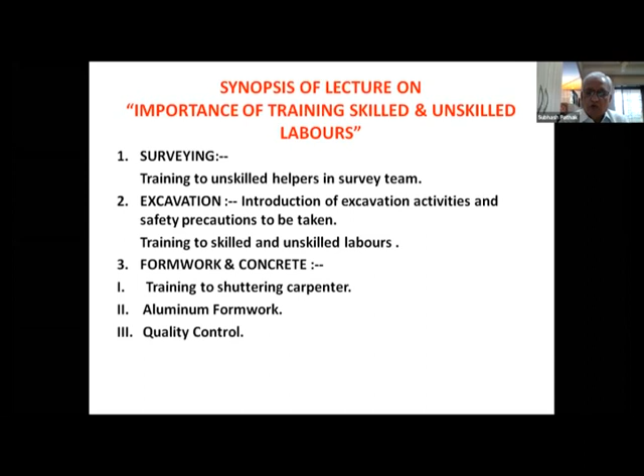Surveying, then excavation, formwork and concrete, then MS reinforcement, masonry, plaster, tile flooring and cladding, plumbing and firefighting, AC sheet roof, then road machinery, roller and paver, and material storage.

The training to skilled and unskilled laborers for the cement, steel, coarse and fine aggregate, marbles and tiles, impact on floor during unloading of full pressed cotton bales, and the conclusion.

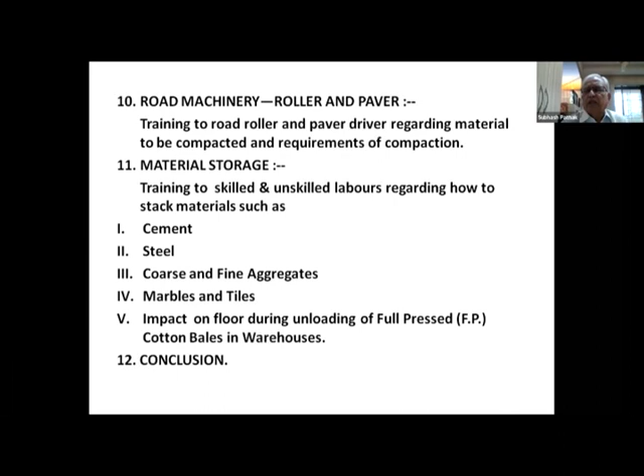During my service in the construction industry for the last 47 years, after retirement also, I am putting my services as a consultant and as a trainer.

So till today also I am getting the latest knowledge of the technology which is being adopted for training to the workers, that is skilled, unskilled laborers, and the supervisors, the engineers, then the project managers and directors. But today's lecture is limited to the supervisory, unskilled, and skilled laborers only.

To start with, any organization, any project has this hierarchy chart of the supervisor, then project manager, and the director. Their functions are: for the supervisor, operational control; for the project manager, administrative control; and the director is for taking the decisions.

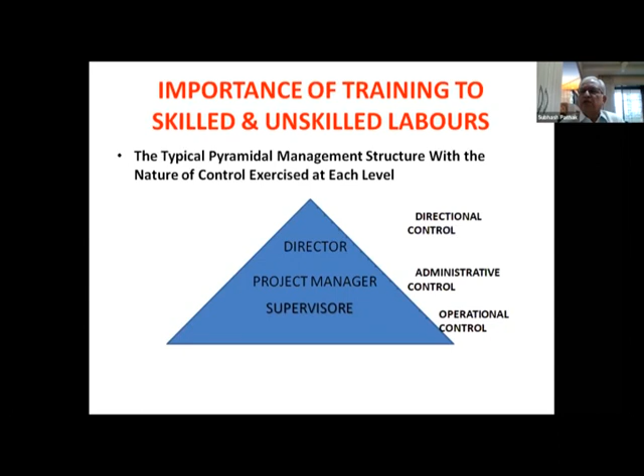So what are the benefits of operational control, and who are the stakeholders for operations? The stakeholders are the engineers, then your skilled and unskilled laborers, then your supervisors.

And on these operational stakeholders, see how much the quality, wastage, and time depends, that we'll be discussing all the while.

It improves the productivity, then minimizes the unproductive man hours. What do you mean by unproductive? That means whatever work they carry out during the day - say if they carry out 8 hours, out of which 2 hours is lost, that is not productive, not giving any results. So that is unproductive. Then the wastages.

Whatever material they are shifting from ground floor to first floor, second floor, third floor in a multi-story building, if that material is not good, the labor should be instructed at the initial stage to sort out the good material from the bad material. This training has to be imparted so that wastages are minimized. Then economizing plant and machinery - the same thing holds good for plants and machinery.

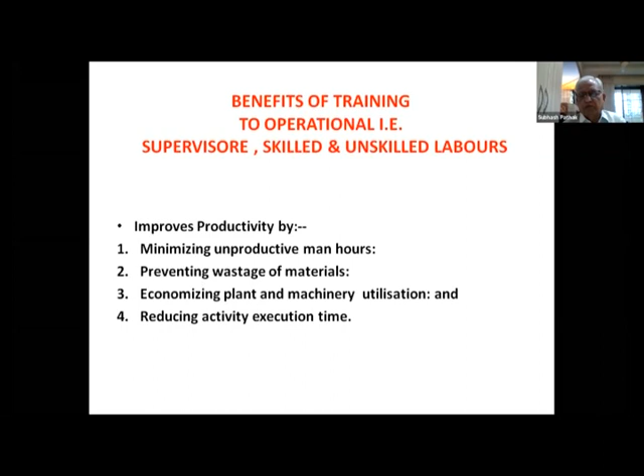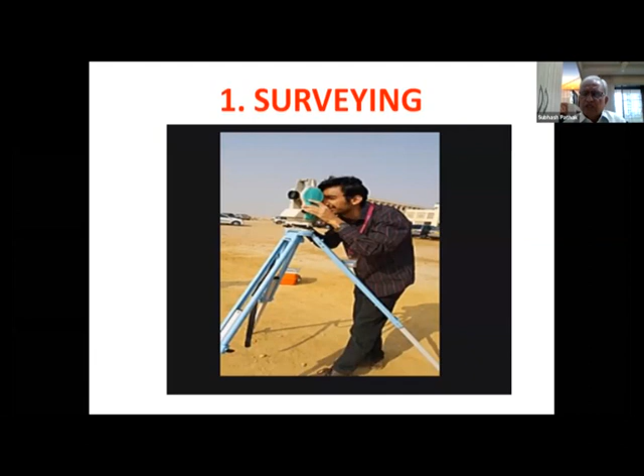Since I worked in the irrigation department primarily, the first job was to make this survey, that is contour survey of the bridge site, canals, aqueduct site, and the approaches. The approaches were about 500 meters upstream and 500 meters downstream, and the structure portion was about 60 to 80 meters. So about a kilometer, 1200 meters jurisdiction, was not an easy task to carry out the survey. At that time I was given only unskilled laborers.

These were the project affected persons, whom I taught how to hold the staff, how to measure the staff, then to make the grid for contour survey, how to make the grids at every 5 meters. One string having demarcation at every 5 meters, about 80 meters or 100 meters long.

Then we used to take the measures and levels very swiftly and smoothly. Very importantly, signaling or instructions are required to be given to the workers at a distance of even 500 meters, so that they understand and act accordingly. Also very important, they have been taught how to take the instrument from the box, dumpy level and theodolite, and how to again reset it. This is also a skilled job because it takes time.

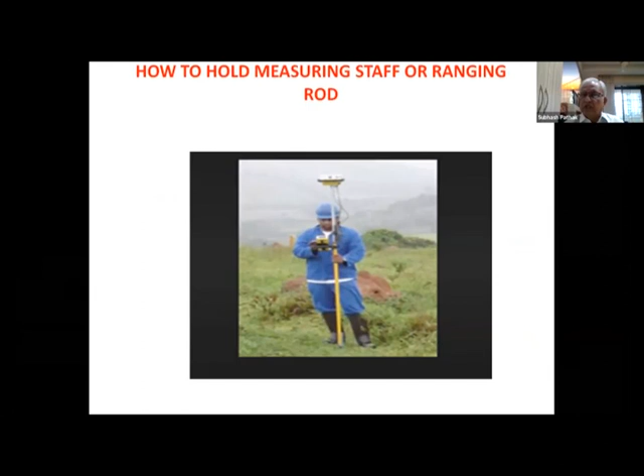Then very importantly, in every project - irrigation, building, or road project - the TBM must be prepared, so the mason is required to be given training. First of all, the TBM is an important structure, and it has to be rested on firm ground, that is the foundation.

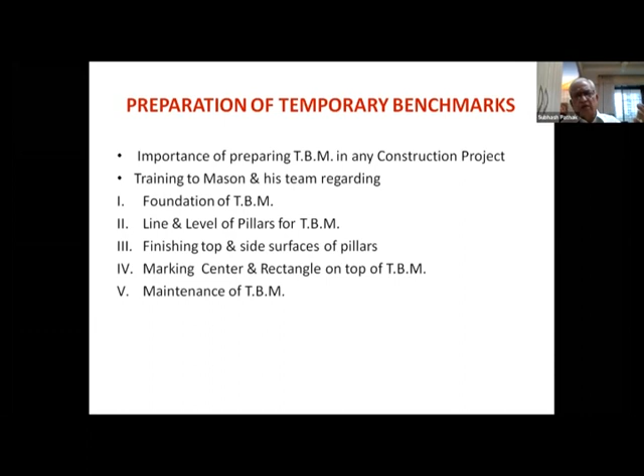Line and level is a must, and especially the top level of the TBM should be perfectly verified with a spirit level. Then the finishing of the top, marking the center and rectangle on top of the TBM, and the maintenance of the TBM is also important. It has to be provided plaster on all sides, and that also 1 foot below the ground level, so that during flood or rain it doesn't scour away.

Now this is the latest topic, the excavation. With the help of a JCB, how the excavation is carried out, and where the excavated stuff is to be dumped. For a trench, the precautions are very less, but in case of mass excavation, if it is black cotton soil, then it is good for the farm but it is a treacherous soil, so it is required to be dumped away, or it can be used only for landscaping.

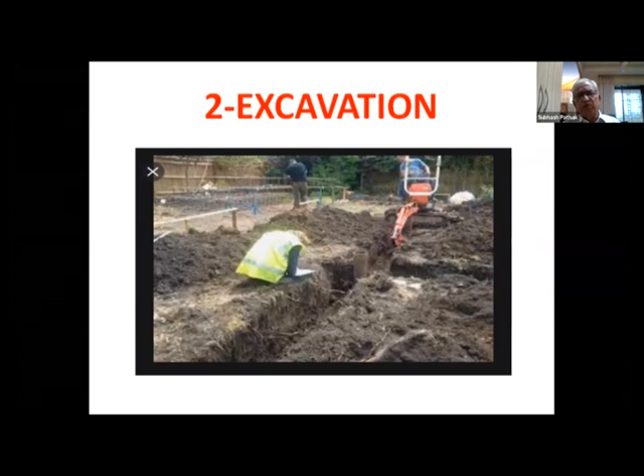In excavation, in my opinion and experience, most of the fatal accidents occur at the stage of excavation only. At an irrigation site, I observed one fatal accident. During a recess of the excavation work, one laborer was sleeping in the foundation trench, and it collapsed.

It is my earnest request and suggestion to all dear friends that laborers are instructed to deposit excavated stuff as and where directed, to avoid collapse of the sides and rework of lifting, and to avoid untoward fatal accidents. At no time are laborers permitted to take their lunch, rest, or let their children play in the mass excavated trench or near the trench.

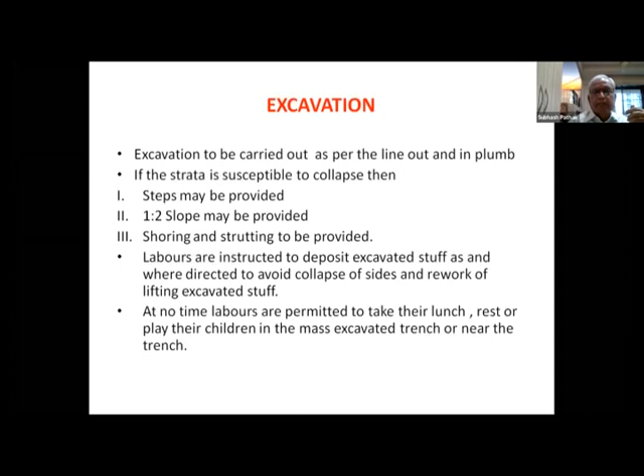Shoring and strutting is also required to be taught to them, especially for the work of manholes, and that too in places like Bombay where manholes are 40 feet deep below the ground. There the chances of excavation collapse are more, so how the shoring and strutting is carried out is very important.

Then the safety precautions. What are the safety precautions? The first safety measure is that we are using radium tape today, so that trespassers are not permitted to enter inside the radium barricading.

Since I also work in Bombay, where pile foundation work was going on, laborers should not be permitted to step down into the bore to take away their chisel or any equipment. The borehole may be 300mm or 600mm, but they should not be permitted to step down. Otherwise, there are chances of fatal accidents.

Then backfilling the trenches. How backfilling is to be carried out to avoid shrinkage, to avoid subsidence of the soil, ground, or roads, is very important. I will show pictures also. The boulders and rubble should not be dumped for backfilling.

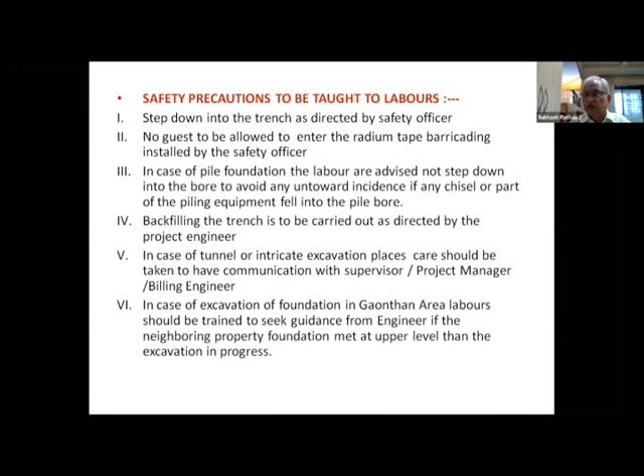If they want to go below the foundation level of the adjoining abutting property, then a risk is involved. This is very important. So training to the laborers in excavation is very important.

Then excavation in hard rock. In hard rock, the contractor is permitted to go up to the foundation level. If the foundation is in hard rock, and the Poclane or JCB operator carries the excavation below the hard rock, he is not able to control the undulations, which may be 0.45 meter, 0.30 meter, 0.15 meter, or even a small level.

So how to control it? That's why the Poclane operator is required to be trained. In my opinion, he should be cautious, first of all, before the foundation reaches 0.3 meter. At that point, the engineer and supervisor should be there.

He should be given a good signal to stop, and the excavation should not be done more than 7.5 centimeters, because up to 7.5 centimeters he can lay plum concrete and make it good. Below that, the contractor has to pay from his own pocket. That's why training to the Poclane operator is very, very important.

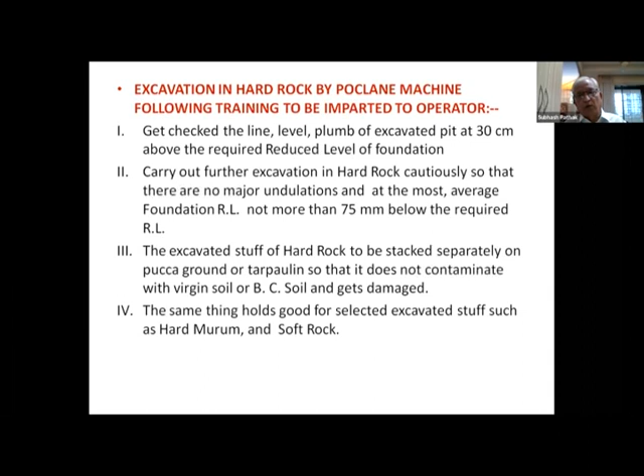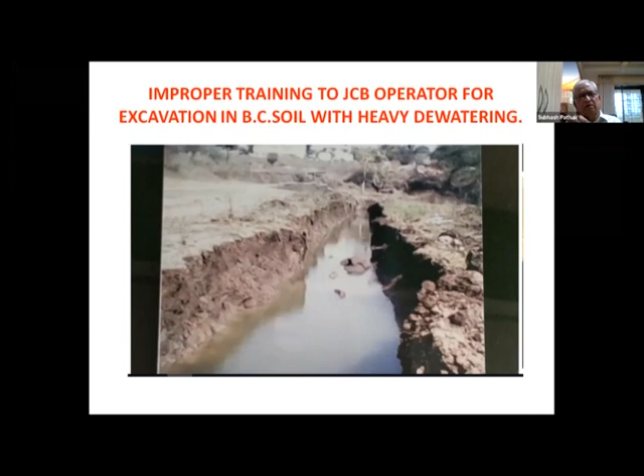So the problem existed for 8 to 10 months, till summer, when the water level in the river receded. Only then could he tackle this excavation problem and the collapse of the sides. Removing the mud is a riskier, more expensive job. This is only because of the illiteracy of the JCB operator.

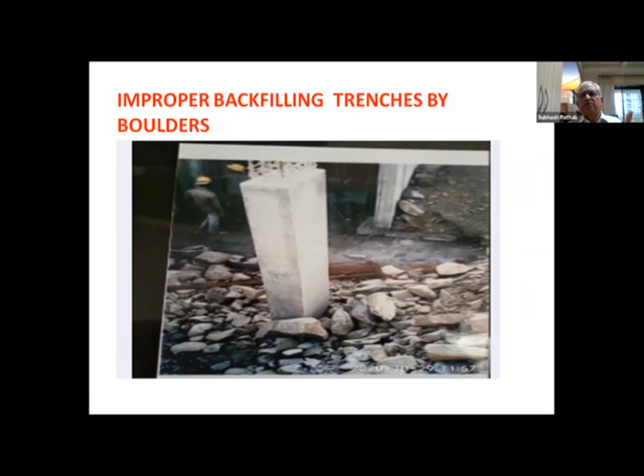That's why backfilling is required to be done with screened sand or hard murum, and at every 0.3 meter, the Proctor density test is required to be achieved. Then and only then will this stand. Otherwise, it will be of no use. Then the formwork, shuttering, and concreting.

Since I am also an L3 auditor, that is consultant to the CQRA, we have observed many shortcomings in the MNC projects. So what are those? Let me share with you.

Regarding the supports to the shuttering, props are required to be given for shuttering. Then double stage centering in multi-story buildings is carried out for the terraces, because in alternate floors one has the floor terrace, other has a 20 feet high terrace. That is why double stage staging is required. Then bracing at the top level, that is 1/3 and 2/3 level. The time of removal of shuttering is very important, and the props left behind.

Then there is the slump test. For the assistance of the engineer or supervisor, the unskilled laborers are there, so they must also be given primary knowledge of the slump and everything, then that work succeeds. Otherwise whatever results are there may not be good, they may not be as per specifications, so rework is required to be carried out.

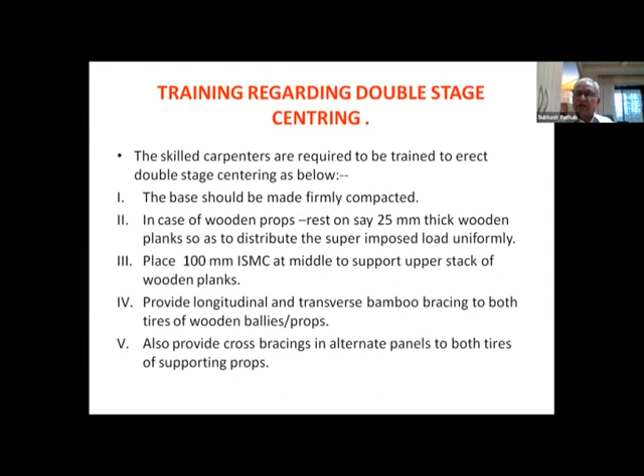Then provide longitudinal and transverse bamboo bracing, and the alternate bays are also required to be braced properly, and also provide cross bracing in alternate panels to both tiers of the supporting.

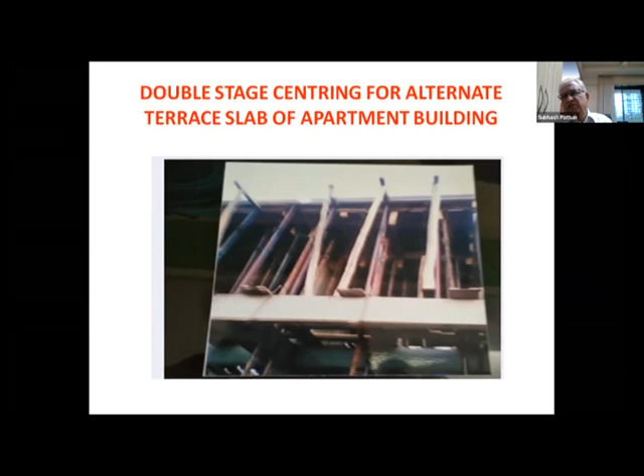Now regarding the trestles. Trestles may be of size 30 centimeter by 30 centimeter or 45. These trestles are also required to be rested on pakka flooring, that is you may provide CC 1:3:6 floor, and on that floor, in case of bridges, you provide the pakka flooring, and on that pakka flooring you erect the pedestals. The pedestal height should not be more than 45 centimeter. In that pedestal, provide anchoring bolts to hold the trestles.

Then the trestles here also may be in 1 tier, 2 tier or 3 tier depending upon the height of the trestle. Generally the height is 8 feet, that is 2.4 meter. Then in this case also provide longitudinal, transverse and cross bracing with 25 mm bars. All these precautions are required to be taken.

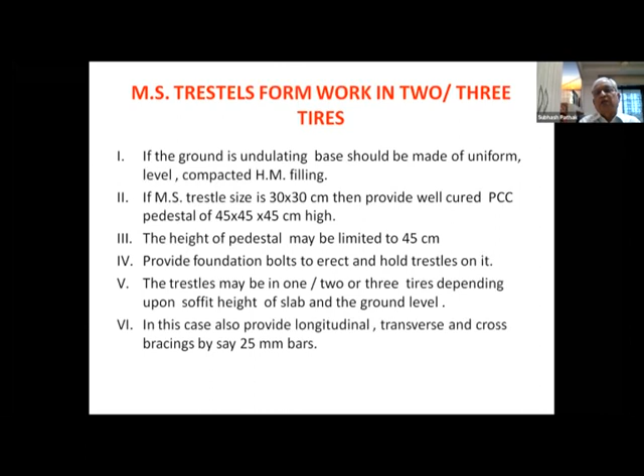It should be ensured at the time of casting the slab also, because previously the slabs were solid slabs, and for the 10-meter span the thickness of the slab was 90 centimeter. So the skilled carpenter is also required to be deployed at the time of casting near the trestles.

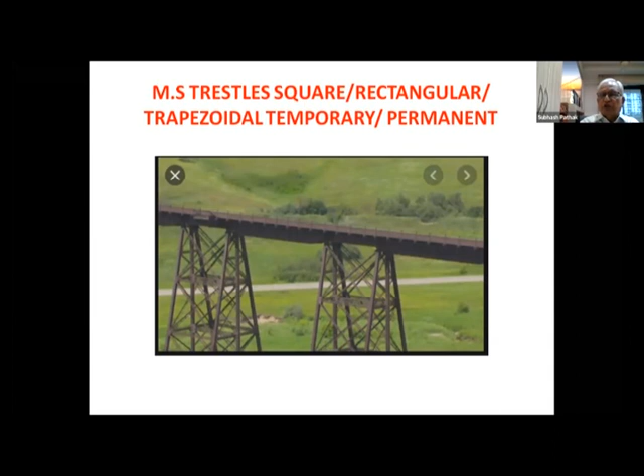See, this is the type of trestles which are also required for your bridges. Every now and then I'm stressing that good constructional practices should be there. And in this case, you can see the props have been...

Now this is the excavation for the 28-story building. So the engineer is standing there, imparting training and instructions to the carpenters, showing how the foundations, the raft, and the footings are to be laid. Such training is required to be given to the skilled and unskilled laborers every now and then. That is where the success of the building lies.

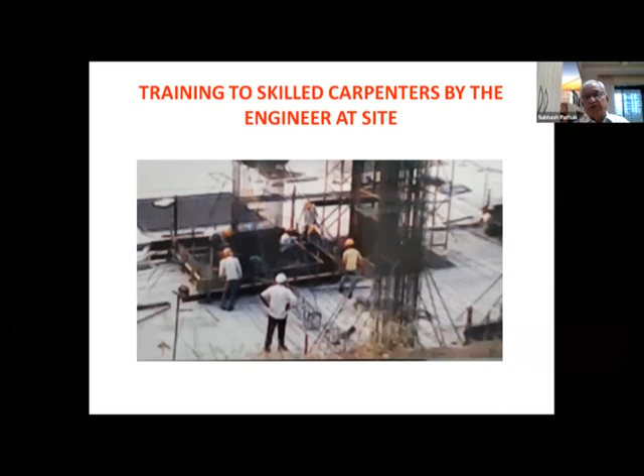Now, this is IS 456. Dear friends, the foremen, the carpenters, and the skilled laborers, though they are not aware of IS 456, we have to give them some primary knowledge. So what is that primary knowledge?

For your site, after casting the slab or column, a minimum of 24 hours should be left. So after 24 hours, that shuttering or side should be removed.

I would cite my own experience that in the year 1980, when I was working at Bombay on a big project. One fine morning, a carpenter approached me in my site office and told me, sir, I have de-stuck the side shuttering of the column, and the column has collapsed after 48 hours also. So the problem started there.

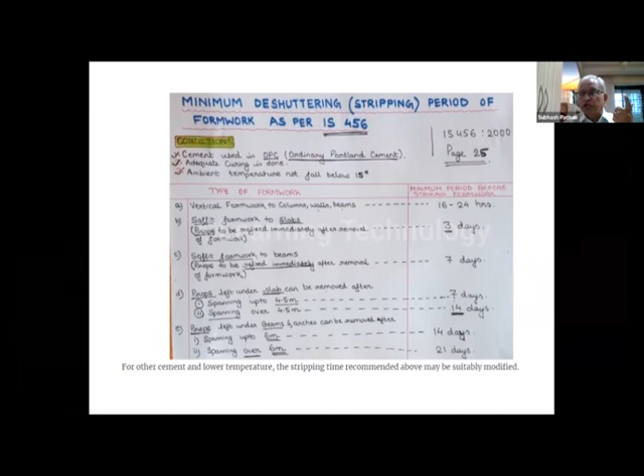And if it is multi-storied, how those props are required to be left behind - that is also one of the skills, and I will be showing photographs of how engineers are neglecting this. Then props for spans up to 6 meters require 14 days, and beyond 6 meters, 21 days are required to be left.

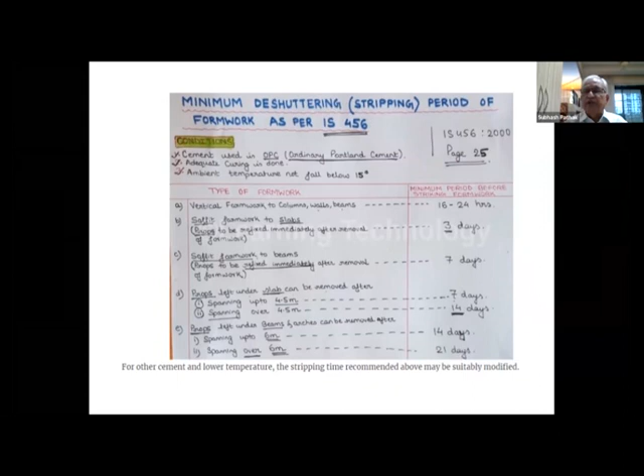So that training is important to impart to the carpenters, to the skilled laborers. It is very important to train carpenters regarding which temporary props are left behind as support to the beam when the upper story construction of casting column, beams and slab is in progress.

Nowadays, to the best of my knowledge, an 18-day cycle is repeated, or if it is aluform or Mivan shuttering, a 10-day cycle is repeated. Under such circumstances, after casting the slab, as per the period mentioned in IS 456 and the span, the bottom props and centering ply that we have studied are stacked out. However, when the upper construction is in progress, it is necessary to keep certain props as support to the bottom floor beams.

I will show the images, and that will be self-explanatory. Those are self-explanatory, see, that one at Bombay, and that also in MNC companies. Generally, 3 to 4 props are left in the 3 to 4 meter span.

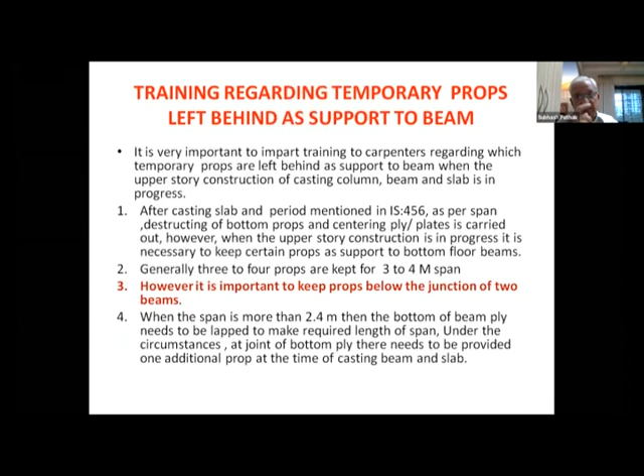However, it is important to keep the props below the junction of two beams. Second, when the beam length is more than 2.4 meters, the plywood is required to be lapped, and at that lapping also one prop is required to be left.

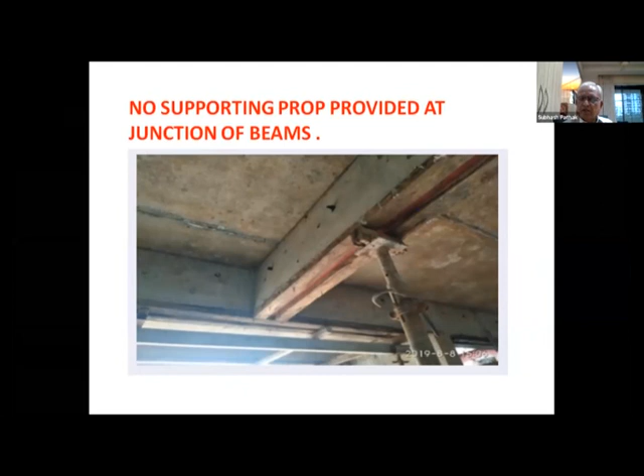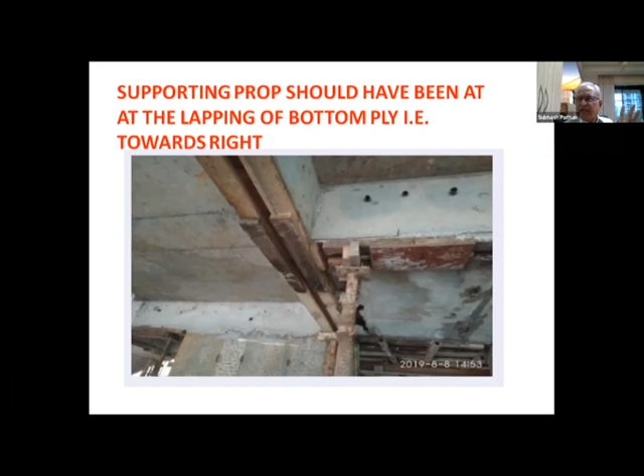See here, the lap is clearly there, but the prop has been provided beyond that lap. So what is the use of that? Here also. This training is required, then there will be zero accidents.

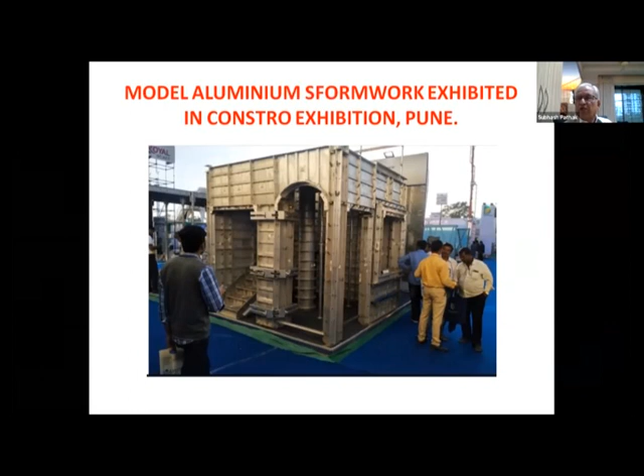Now this is regarding your formwork. In Constro, many companies are there, so I have taken snaps from there. See the accuracy, see the plumb, and that is required to be taught to the carpenters.

Now regarding the concreting. For formwork, we have to take utmost precautions, and now concreting. Nowadays we are getting concreting by RMC, but most concreting is also required to be manufactured at site on a volumetric basis or weighment basis.

So what are the likely mistakes, and what is the domain where skilled and unskilled laborers are required to be given training? First of all, the dimensions of the measuring boxes. Dear friends, even fresh engineers don't know the dimensions of the measuring boxes.

This training is also required to be imparted to the laborers, that the dimensions are 0.3 by 0.3 by 0.375 meters.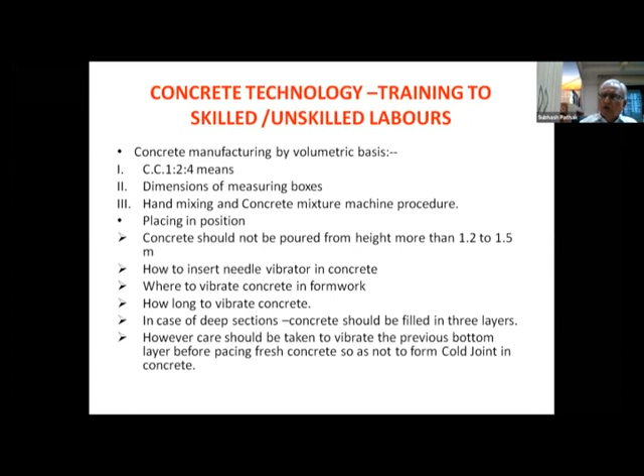The thickness is 20 centimeters and cold joints are formed there. Why? Because the difference between laying the bottom concrete and the top concrete is more than 1 to 2 hours, and the bottom concrete is already set. This is the picture.

Now see, here the soil is being contaminated, the soil is being mixed with the metal. Your metal is very good, however the laborers are not given training, or there must be a supervisor who should be there giving them instructions all the while.

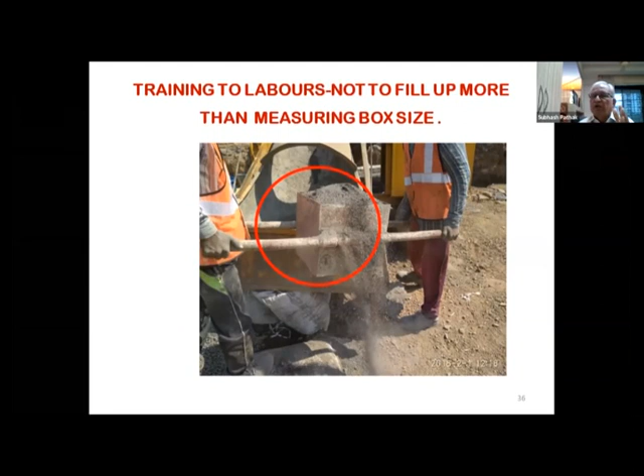Now see this is also a picture. This is not weighment batching, so that is volumetric batching. See, the heaps of sand are there, that is beyond your required size, so naturally the sand will be more. Now see the effects, these are the ill effects, what is that—honeycombing.

What do you mean by honeycombing? In honeycombing, the voids which are more than 6 millimeters are connected with each other.

Superficially a skin is there, and that skin needs to be removed with a mallet, and then you can see the severeness of the honeycombing. Especially in water retaining structures, this is very dangerous. That is why water retaining structures are required to be tested with mallets. If it gives a ringing sound, it is good. If it gives a hollow sound, then that concrete is not good - it is bound to be there.

Especially in the case of beams where the steel reinforcement is in 3 tiers, the chances of honeycombing at the junction, that is in the shear zone, are more.

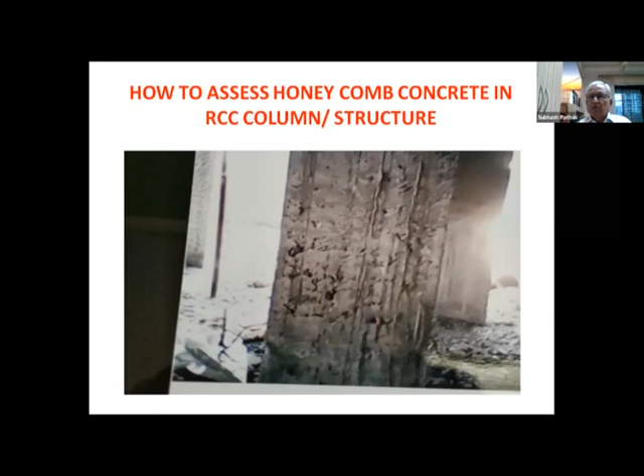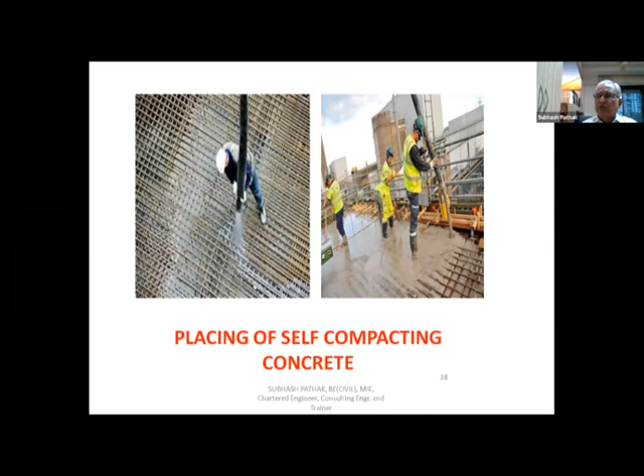Though the engineers are there, training is also required to be given to the supervisor. What is that training? What do you call honeycombing? What do you call crazing? Why has this crazing occurred? The crazing has occurred because there is improper curing. And it is the responsibility of the engineer to differentiate whether there is structural crazing or non-structural crazing.

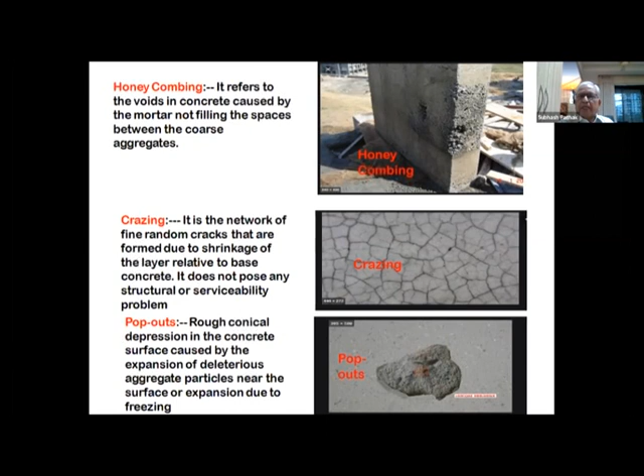But the problem remains regarding the leakages. So this is the cracking, and this is the disintegration.

Now quality control is required to be enforced at the sites. First of all, the grading. The assistants are unskilled laborers working with the quality control supervisor or the quality control engineer. So what is that? At least they must know the sieve sizes: 20 mm, 10 mm, 6 mm, 4.75 mm, then 2.36 to 1.18, then 600 micron, 300 micron, 75 micron. They must be given training on all this.

What is the importance of sieving? Because every truck at the RMC plant requires sieve analysis of the metal, and then the project engineer can take the decision for the gradation and the mix design.

Then this is also the training regarding the slump cone, especially for the slump of self-compacted concrete. So what is T50 and what is the total slump? T50 means the time required for the concrete to pass through a 500 mm diameter circle - that is the slump. Then the 1000 mm diameter, that is the slump, whether it is 890 or 650 or 850. All these measurements we have to teach to the skilled laborers.

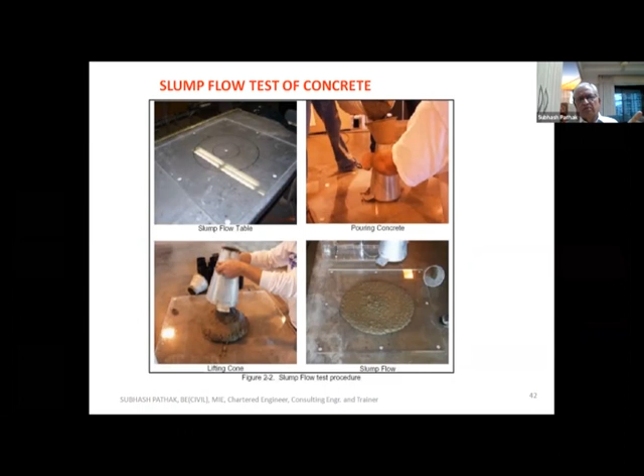Then regarding the slump cone also: the 100 mm top diameter, 200 mm bottom. So primary knowledge is required to be imparted.

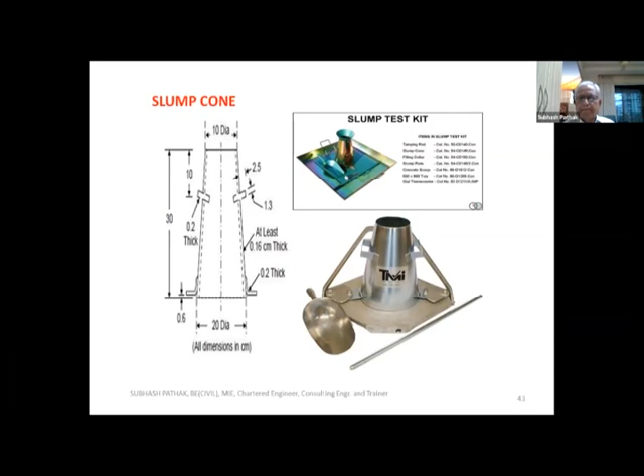Then the MS reinforcement. In MS reinforcement, especially for saline or coastal areas, training is required to be given to the bar binding workers, that the ends of the binding wire should be taken inside and not kept outside. Because if it is kept outside, it becomes a source for penetration and ingress of water, and ingress of carbonation also.

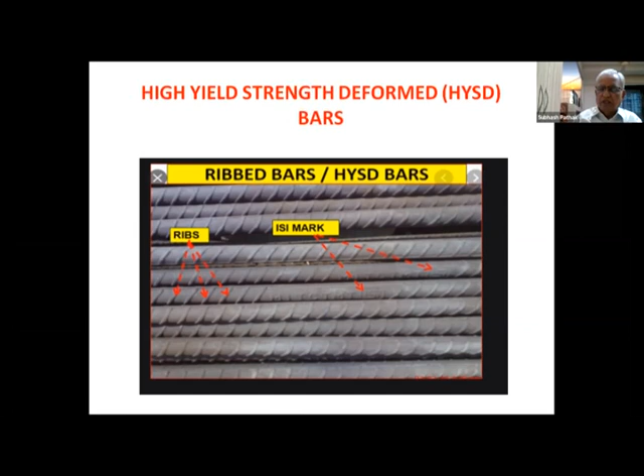Secondly, what training is required to be imparted? Nowadays the government has made it mandatory to provide the ISI mark at every 1 meter. At every 1 meter they should verify it in the consignment.

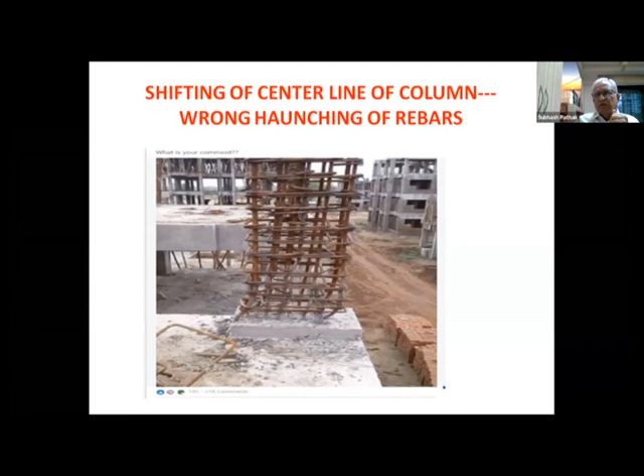So this training is required for the steel reinforcement. All the bars are required to be tied and fixed with stirrups. Then the bottom bars, the corner bars, are required to be taken into a 45 degree splay. Then the shear will be controlled.

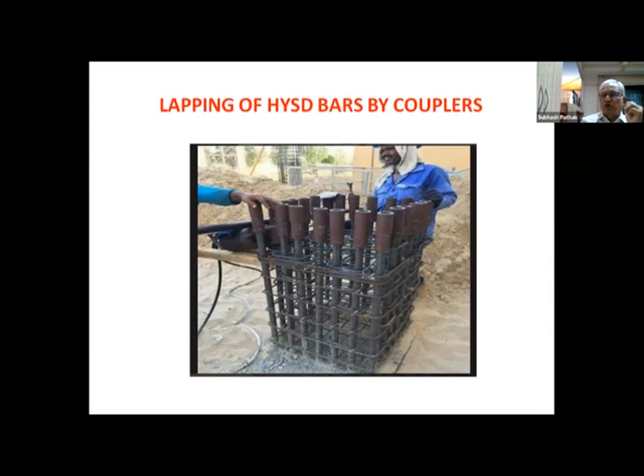Then for bars which are more than 16 mm dia, generally coupling is provided for big projects. So what is that coupling? That primary knowledge is also required to be imparted to the bar bender.

Now, this is a very common experience, and whenever I inspect a site, I find that the hooks are not properly bent. First of all, a 9D hook should be there, and that angle should be 135 degrees. This is not observed at many places, and we find these drawbacks. So this training is required to be imparted.

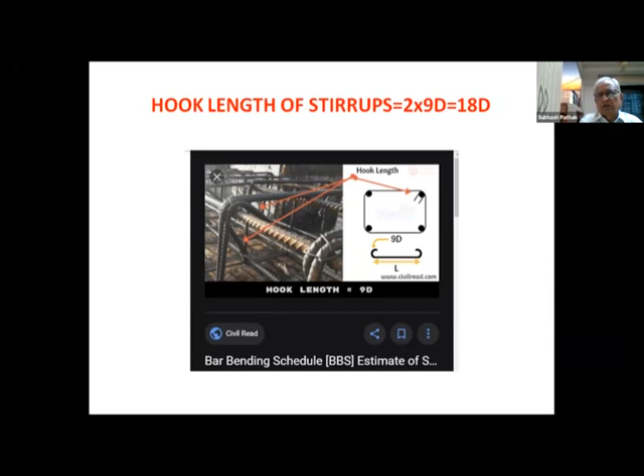Now regarding the masonry, this is relevant for the retaining wall. About 2.5 meter height, earth is retained from the inside. So the mason is required to be given training regarding the headers, the importance of the headers, and the importance of the weep holes.

So how is the filter metal provided? The metal filter is provided of 0.3 meter of 20 mm, then a height of say 15 centimeter, then 10 mm, then screen sand, again 20 mm metal, then again 10 mm, again screen sand, and about 0.3 to 0.45 meter by 0.45 meter at the mouth of the pipe is required to be filled. Otherwise it is of no use, as all the embankment soil will choke up the pipe, and the surcharge, that is saturated earth pressure, will be more and will not be released, and the cracks will start.

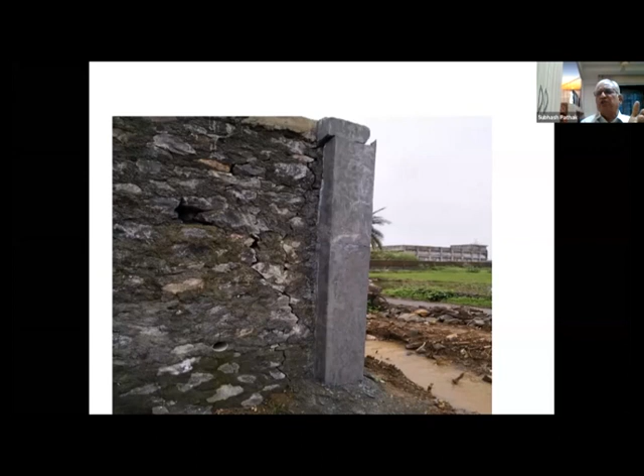Now the latest technology is that we provide polymer modified mortars. Traditionally we were using mortars in 1:5, but now we are using Buildtech, that is polymer modified mortars for AAC block construction, and nowadays it has become versatile. So here also the training is required on how much thickness is to be maintained, because the traditional thickness is 12 to 15 mm, but here 4 mm thickness is sufficient. Otherwise there will be no economy.

Then in case of bridges, training is required to be imparted to the carpenter and to the mason also. So what is that training? What do you mean by batter, and how is it to be checked? So for the piers, if you give for example 1 in 10, what do you mean by 1 in 10? And how is it to be checked every now and then, for every layer, or every 30 centimeter or 500 mm layer.

So one template is required to be made, and the engineer should give that template, measure it, and give it to the mason and the carpenter. Otherwise he will have to give a sheet showing, at every 1 meter, how much reduction there will be in the width. So all this training is required to be imparted. The engineer's responsibility is very much, so the engineer has to pay attention to this training also.

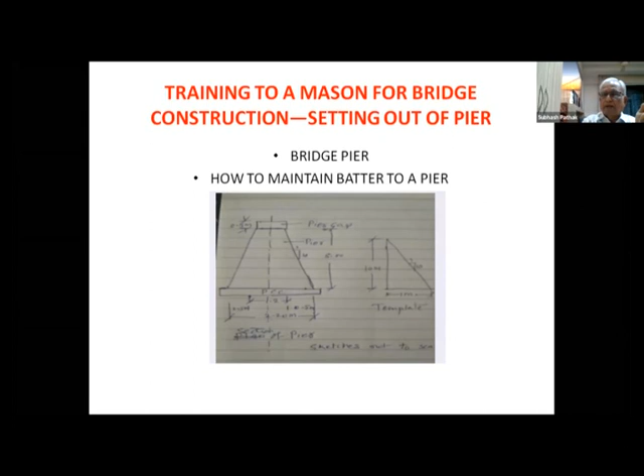Then cement plaster, training to unskilled and skilled laborers. What is required in cement plaster? First of all, the cement mortar is required to be mixed in the MS tray and not on the virgin slab. Then, the mortar prepared for plaster should only be used within 2 hours, depending on the strength of the masons deployed and the scope of the work.

A stale mortar, that is mortar beyond 2 hours, should not be used at all. What happens is before lunch they prepare the mortar, take lunch of 1 hour, and after lunch they use it by mixing some dry cement. That is a very untraditional practice. I have observed it at many places, because the contractor tries to save cement, but his laborers get bad effects after that when the plaster peels off. The mason must also be trained to avoid using dry cement, especially when providing bands. So he provides dry cement, the mortar sticks, but after 6 months that plaster gets peeled off because of debonding.

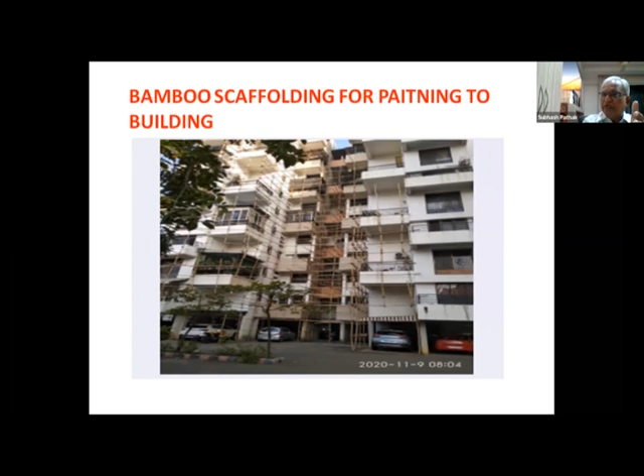Now here see the latest work of the painting. You can observe that the scaffolding has been done with bamboo, and you see the end of the bamboo - they have not made it rest on the ground totally. Only the point is resting, and the bamboo portion is getting cracked, and there are chances of collapse because the load is coming on that bamboo.

See, not one or two - one can understand, but everywhere. See, here also, here also. So this has become a practice. This is the negligence of the engineer - they are not taught it correctly.

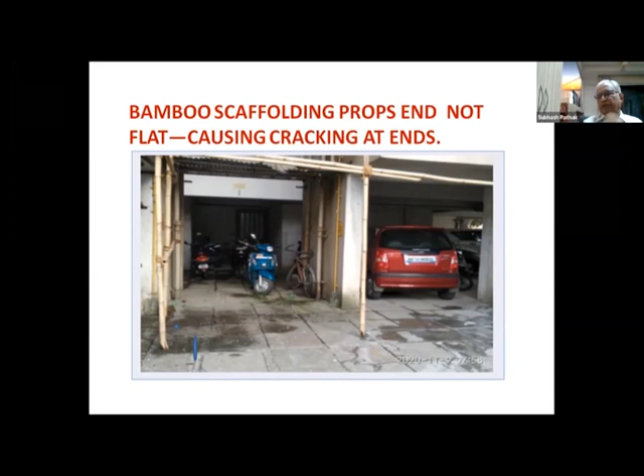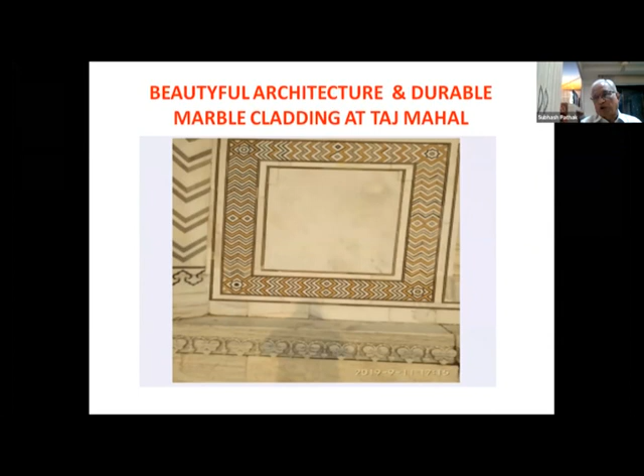Now the tile flooring - what is that tile flooring? I observed Taj Mahal. Taj Mahal is now a monument of 367 or 368 years. Still, these are natural stones, and those are stuck up, having good bond. So what is the remedy? What is the secret behind that? At one place only I could catch this photo - previously, 367 years ago, lime and surki mortar was used to be provided there, and that gave good bond. But nowadays we are not getting that. Tiles are peeling off.

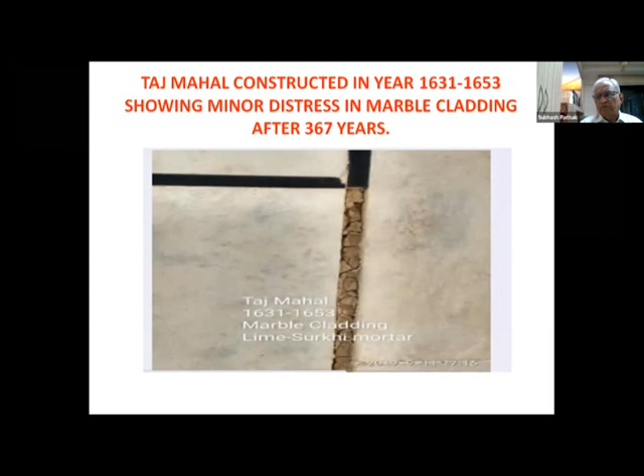Then plumbing and firefighting - what is the primary knowledge we should impart to the laborers, skilled laborers? What is that? Color code. C class, that is the heavy pipe, shown by red color - this is the code approved by IS code. Then B class is the pipe shown in blue, and A class is the pipe for... Training is required - when it is exposed, you provide C class; when inside, you provide B class; and for very limited or unimportant works, you provide A class. So like that, the instructions are required to be passed on.

Then in case of UPVC, at least you must inform them the long form - what is that? UPVC is unplasticized polyvinyl chloride. What are its properties? A rigid, chemically resistant form of PVC. What is CPVC? Chlorinated PVC pipes, polyvinyl chloride. What is the difference between them? The use includes hot and cold water pipes. So at least we must train them like this.

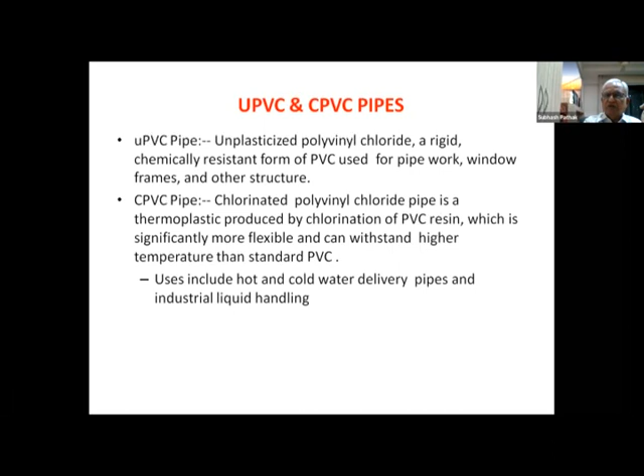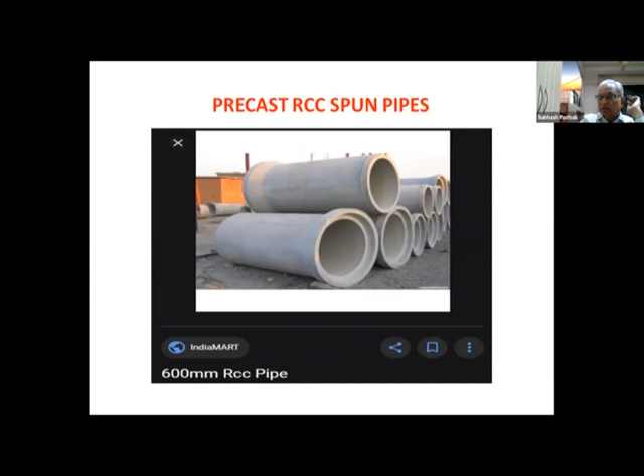Then this is how it is to be stacked - this is how the pipes are there for your CPVC. Then these are the precast pipes - how those are to be stacked, and also spun. See, these are the manholes, sorry, inspection chambers. What do you mean by light duty? What do you mean by medium duty? What do you mean by heavy duty? At least we must give them this information on duties, depending upon where the manholes are provided.

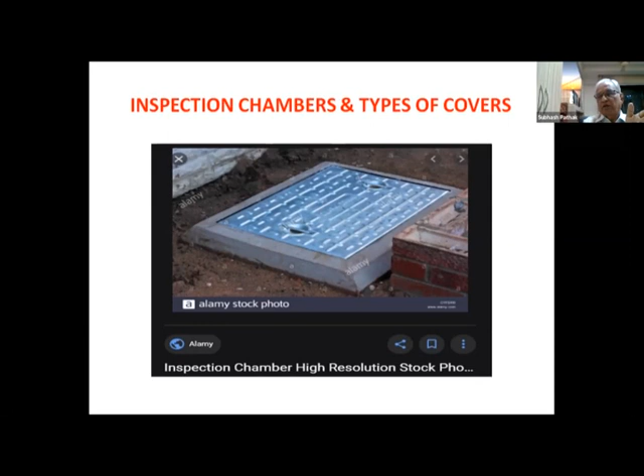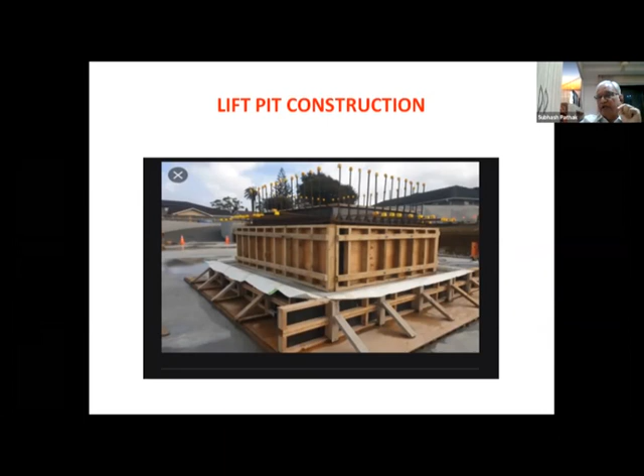Then fire fighting, then asbestos. Since I worked about 20 years in the warehousing corporation, I have seen many fatal accidents. So how to avoid it? Precautions are required to prevent fatal accidents due to falling while fixing AC sheets on new roofs or the repairs of the warehouse.

So the safety belt is required to be fixed for the workers. Secondly, the worker must walk on the AC sheet where the purlins are there. How will he come to know while walking on top where the J hooks are, so that he can put his leg there and survive? If he puts his leg in the valley, it is bound to crack and he is bound to fall, in case of old structures.

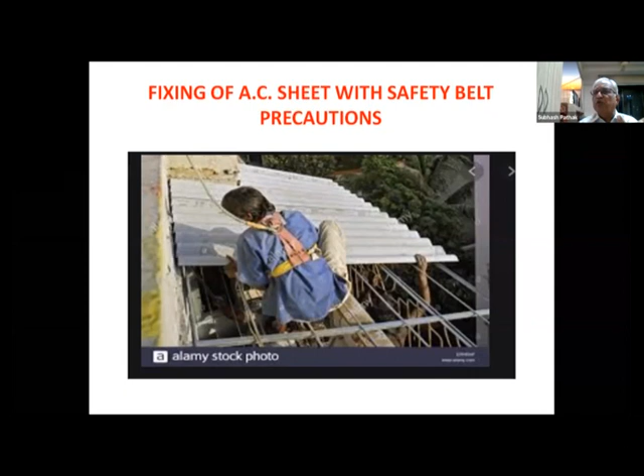Then how to stack the AC sheets, that is also important. From this picture you can see the worker has been provided safety belts. I would like to insist that the safety belt should not be more than 3 meters in length, otherwise it is of no use and he will sustain injury.

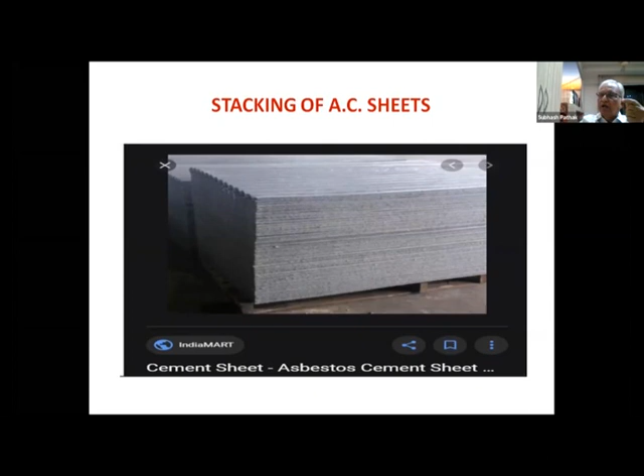The AC sheets are required to be stacked on wooden battens, only 3 battens - one at each of the 2 corners and 1 at the center. Or you may stack it on a sand bed, or on a rice bed - meaning you can keep it on paddy.

Then the road roller and the paver - at least primary knowledge is needed. What is that primary knowledge? Primary knowledge for the road roller driver: what is cohesive soil, what do you mean by non-cohesive soil? By experience he gets the rolling achievement.

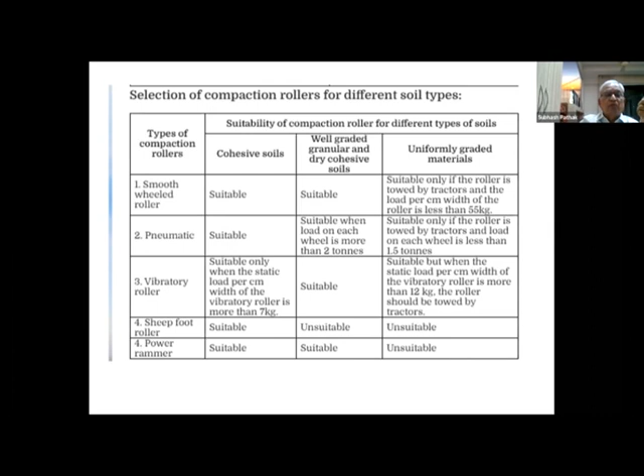But for cohesive soil, what type of roller should he use - the smooth wheeled roller, what is that? Then what do you mean by pneumatic? What do you mean by vibratory roller? What do you mean by sheep foot roller? And what do you mean by power rammer? So all these I will show you.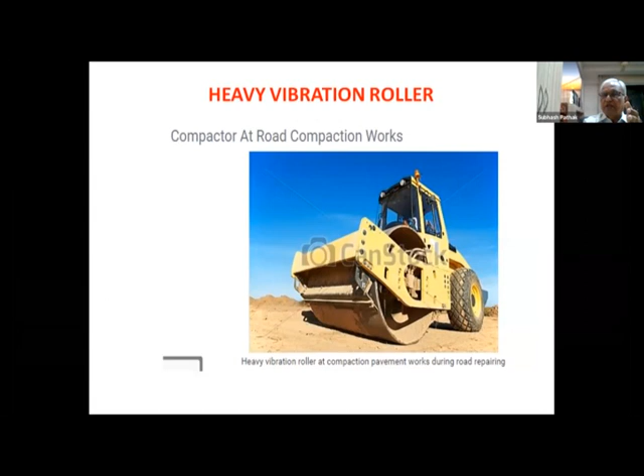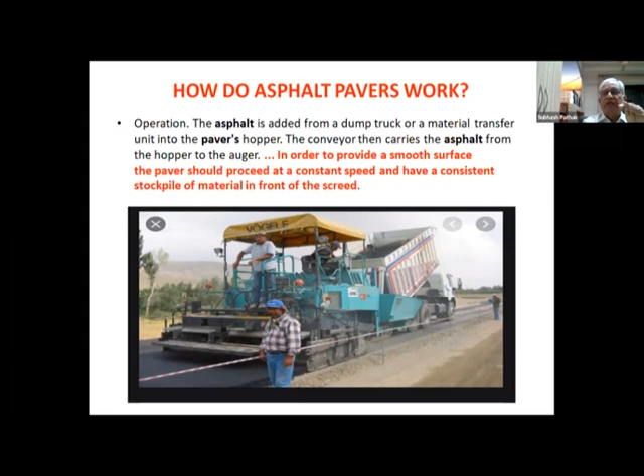And this is the paver. In the paver, the skill lies with the operator for construction of the road, that he should give a proper camber so that the storm water flows very smoothly. This is how the camber is required to be provided, but this knowledge is required to be imparted to the paver operator.

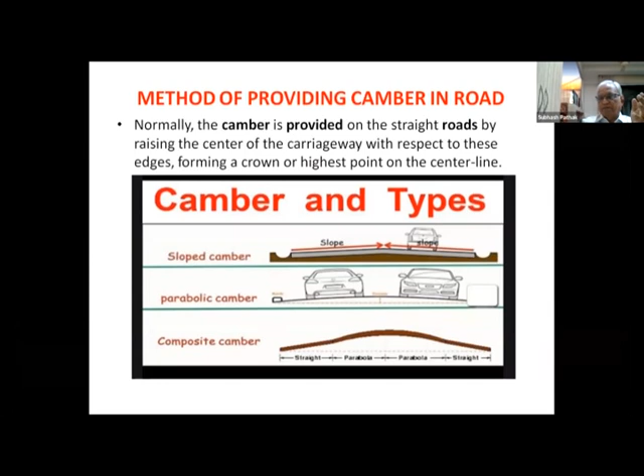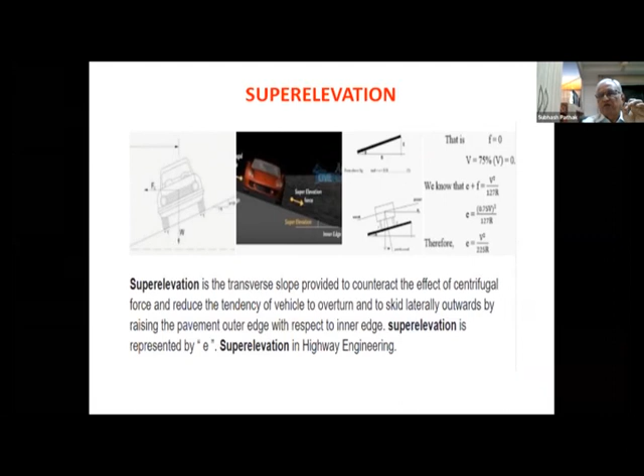Dear friends, this is regarding the super elevation. All this primary knowledge is required - though we are engineers, he is not an engineer, but he needs primary knowledge of in how much width there should be rise in the embankment and rise in the layers, concrete, or it may be asphalt layers.

Then the last point, please bear with me, just 5 minutes. How the materials are required to be stacked is very important, because from that material only you construct the building or the roads.

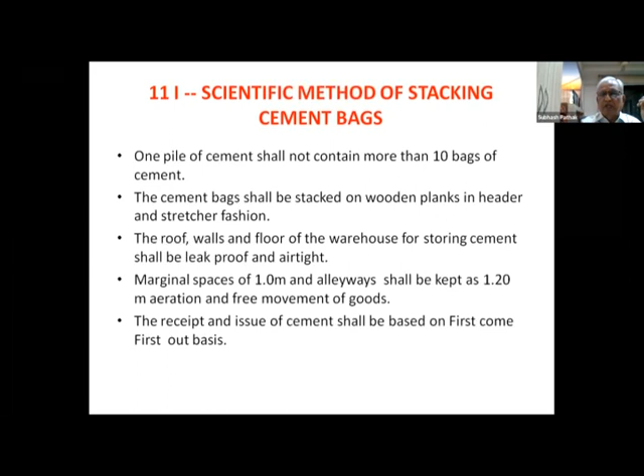So regarding cement, I will show the scientific storage. The cement is stacked first on wooden planks, then the height of the stack is 10 bags of cement - in one pile there should be 10 bags. Otherwise the cement gets set, and after keeping it for 1 or 2 months a set is formed, which needs to be loosened.

Then secondly, alleyways of 1 meter are required to be kept from the walls, and also at the center. Very important is that cement receipt and issue should be based on first come, first out - whatever cement comes in first should be issued first. Then steel bars are required to be stacked diameter-wise, on a sand bed or on wooden bullies, with the bottom layer on wooden bullies.

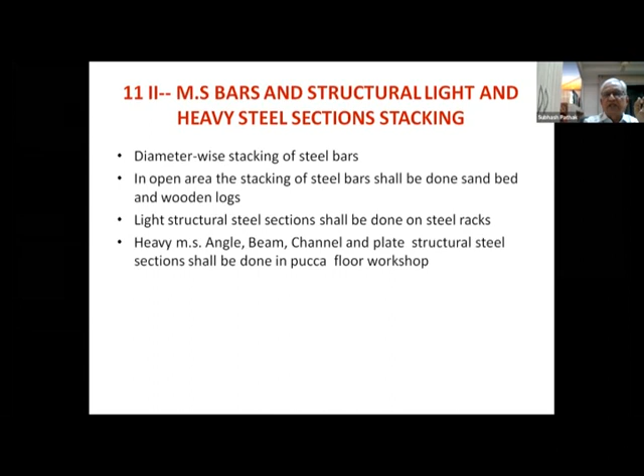Then the heavy MS angles and channel sections - how are they stacked? These are the steel bars; below them a metal layer is laid, and on that metal layer the bars have been stacked like this.

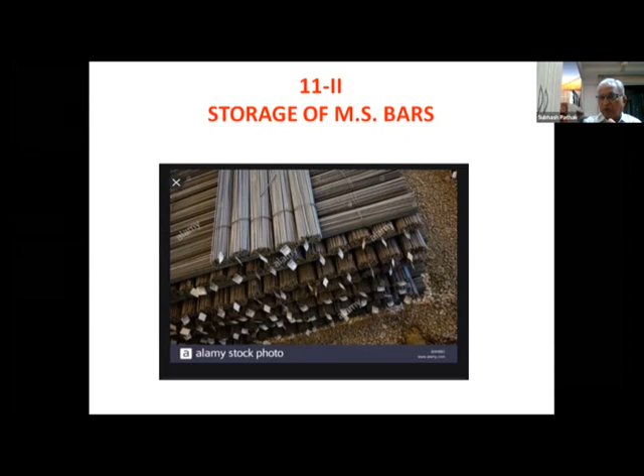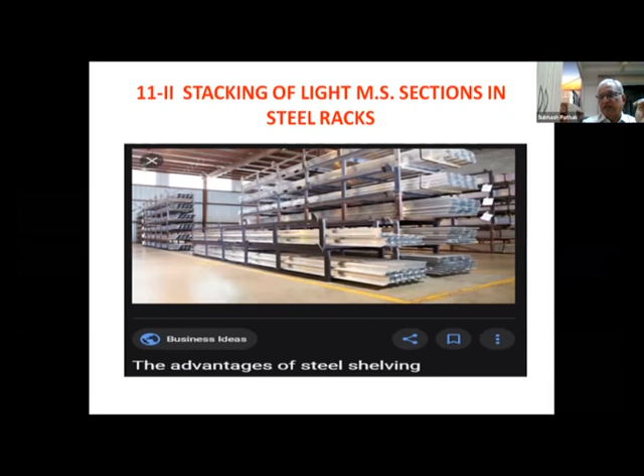Then for the steel sections, that is plate section, channel section, angle section, beam section - how these are to be stacked. Then this is the light section, how those are to be stacked in the racks.

Then storage of the coarse and fine aggregate that I showed you. First of all, the coarse and fine aggregate are required to be stacked on the pakka platform, so that the soil doesn't contaminate and good RCC concrete is formed.

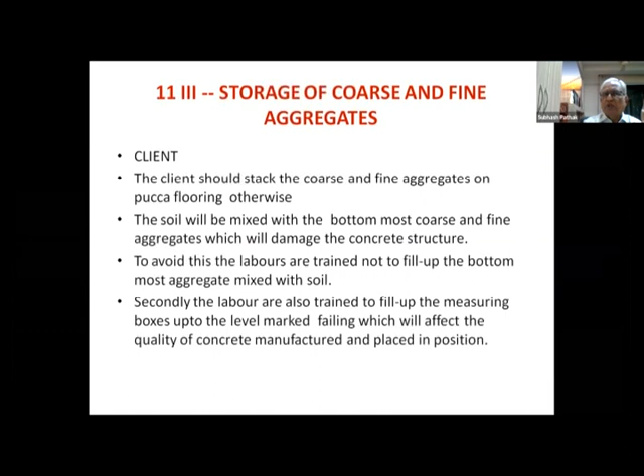Then handling of the cotton bales. What do you mean by cotton bales? When the cotton is pressed together, a bale is formed, and that bale weighs about 180 to 200 kg. In the warehouses, especially in Vidarbha, cotton growing is more - Khandesh, Jalgaon, Dhulia, Buldana, Amravati, and Nagpur.

So cotton is a bumper crop, and the bales are formed. The bales are about 180 to 200 kg each, and those are stacked in one godown - stacked about 2,500, at a height of about 4.5 meters.

So in stacking, no problem arises. But when you deliver it, the Hamal or Kuli throws the bale from the 4.5 meter height onto the concrete floor. So due to impact, that concrete floor starts deteriorating.

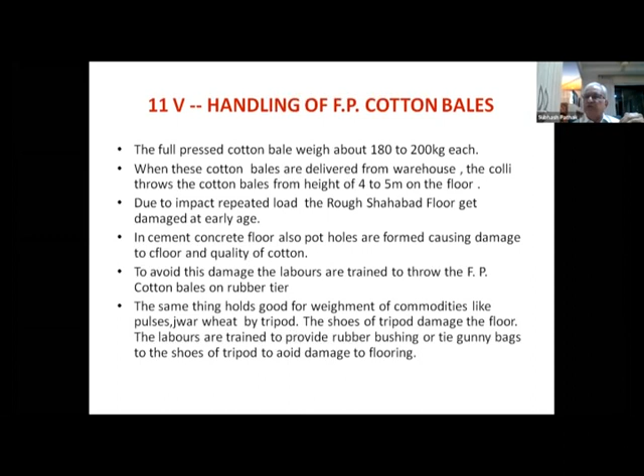So what are my conclusions? First of all, the skilled and unskilled laborers are clever - those are human beings, and their potential needs to be tapped by utilizing them for speedy, quality, and completion of the project.

By imparting training to skilled and unskilled laborers, wastage and rework can be minimized, and productivity can be increased in projects. The engineer can save time and cost overrun. The employer, builder, or promoter can achieve customer satisfaction as per ISO 9001 and fetch more profit.

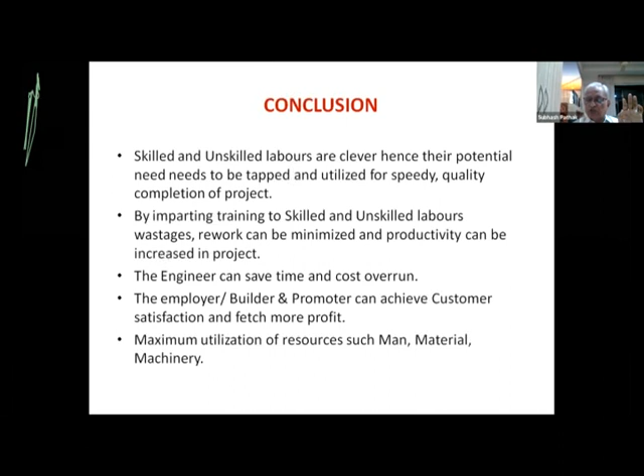If they observe that wastage is less, time and cost overruns are less, then they can fetch the profit. Otherwise, no. Then maximum utilization of resources such as man, material, and machinery.

Then the skilled and unskilled labor supervisors - with the latest technology, training to the skilled and unskilled, in my opinion. With the advent of technology and improvement in financial status, supervisors and skilled and unskilled laborers need real-time management training to improve productivity, quality, and avoid time and cost overruns.

So how? Smartphone operations and training are required for conveying messages about bad quality supply of materials, so the foreman can give this information to the project engineer.

Then he can take photographs and send them to the project manager for approval of the workmanship, for the quality, line, level, and remote intricate places. So I say a 30-story, 40-story, or 80-story building construction is going on.

So messages must be there, for communicating real-time progress of work for further planning for the project manager.

The same thing holds good for communication between the concrete boom placing workman at remote place height, and the boom pump operator at ground level - because the operator remains at ground level while the worker remains at height or at the bottom of the foundation. So there must be some communication.

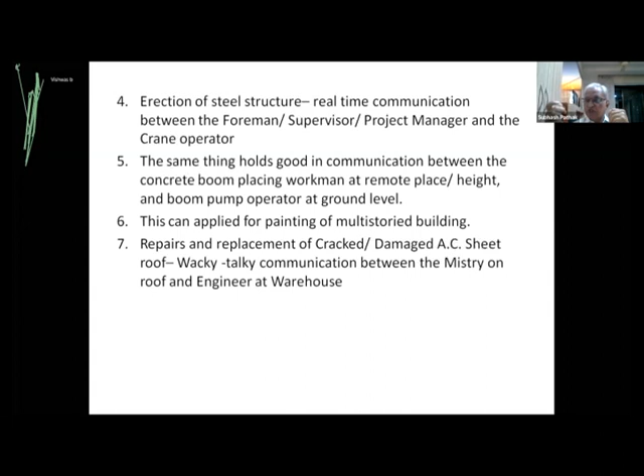So these are my observations, and thank you very much that BI Pune has organized this program. I am very much thankful to them, and let us conclude this session. Concluding session from my end.

Thank you very much. Can you hear me, sir? Yes, sir, yes, sir. Please stop the sharing. Yes, yes. One minute.